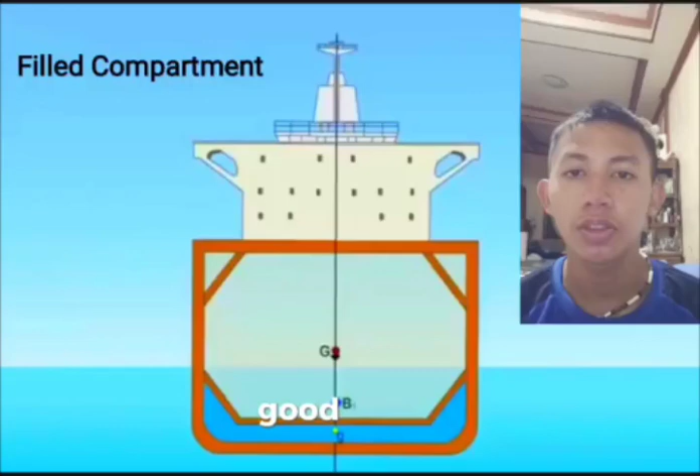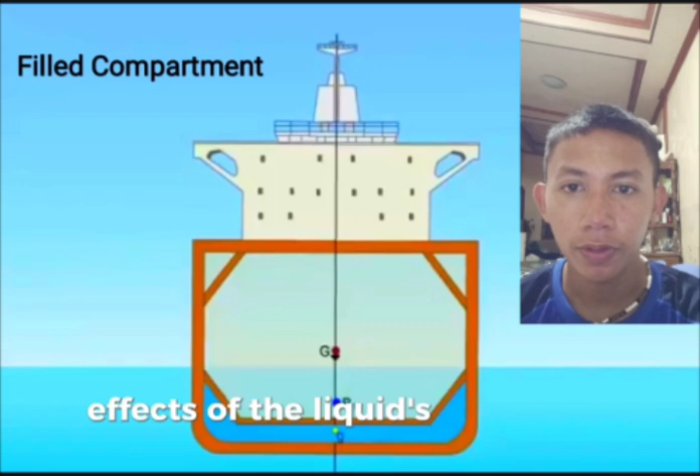I am Cadet Emmanuel Maglaslasea, reporting for today about the effects of the liquid's free surface inside a tank or compartment to the vessel stability.

The free surface effect significantly impacts the stability of a vessel, particularly those carrying liquids. Number one, understanding the free surface effect: when a tank or compartment isn't completely full, the liquid inside has a free surface, a boundary between the liquid and air. When the vessel heels or tilts, this free surface also tilts.

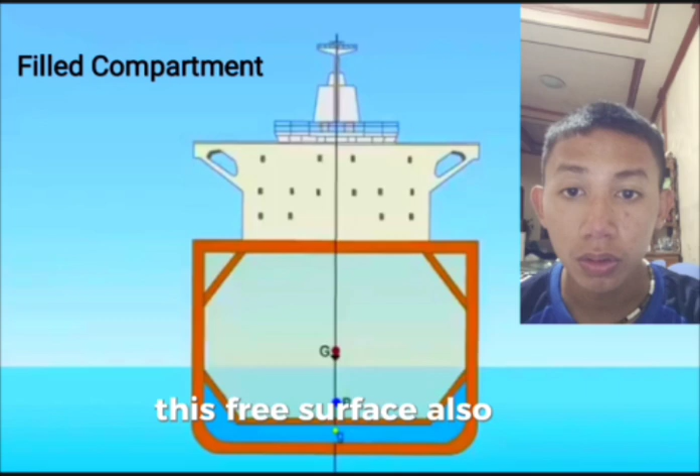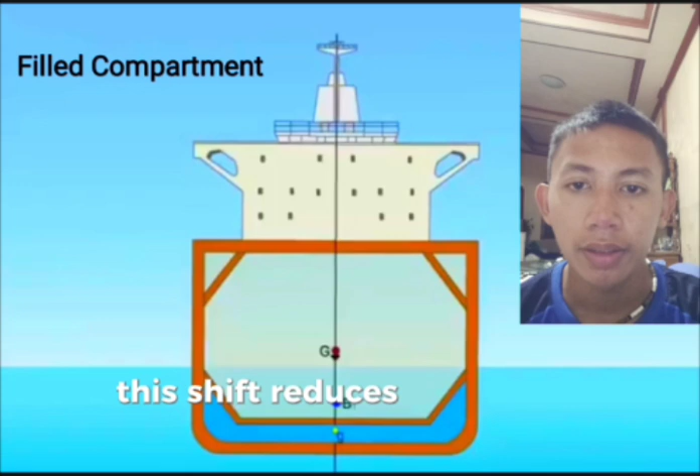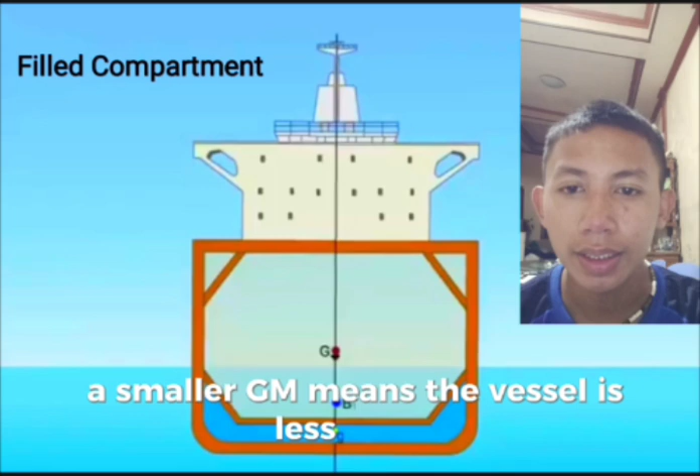This liquid's movement within the tank creates a shifting center of gravity, known as CG. This shift reduces the vessel's metacentric height, known as GM, a key measure of stability. A smaller GM means the vessel is less stable and more prone to capsizing.

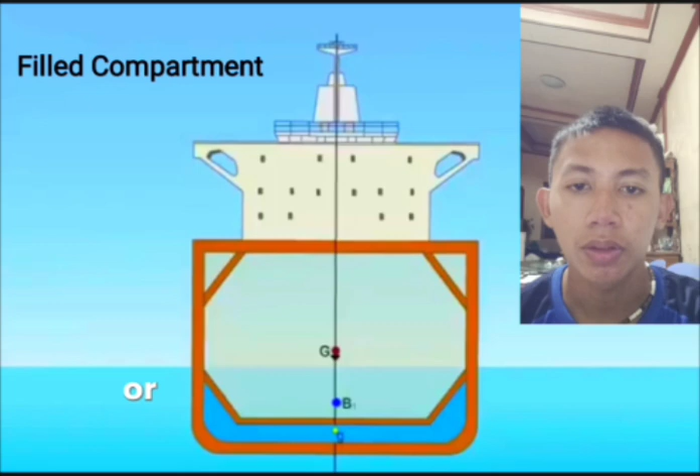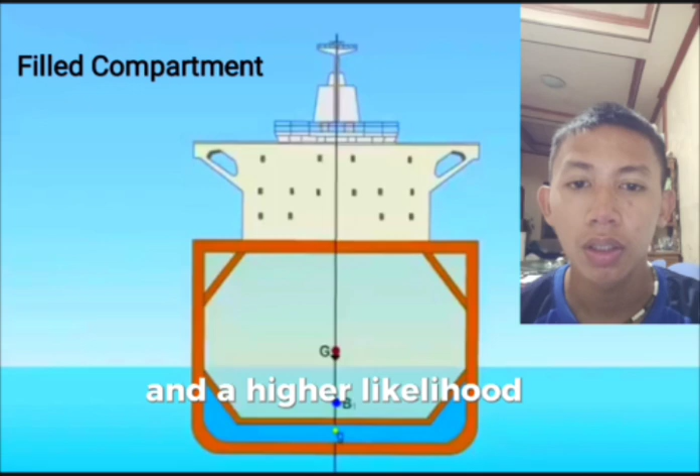How it affects stability: number one, reduced metacentric height or GM. The primary effect is a decrease in GM. A lower GM means less resistance to rolling and a higher likelihood of capsizing. The more liquid, and the larger and more shallow the tank, the greater the effect.

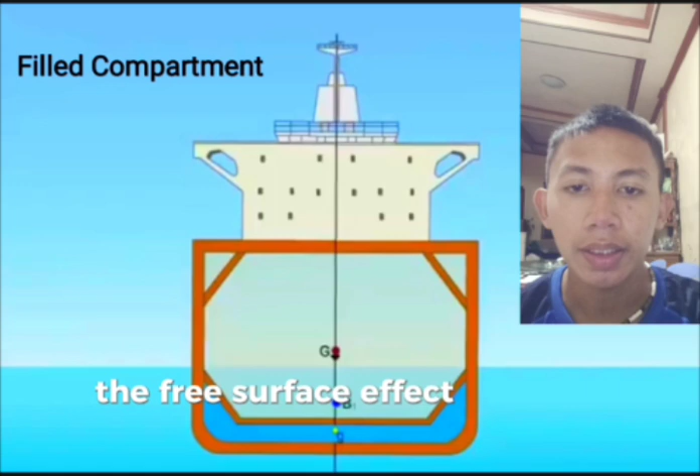Number two is increased rolling period. The free surface effect increases the vessel's rolling period, meaning it takes longer to return to its upright position after a disturbance. This prolonged rolling can exacerbate instability.

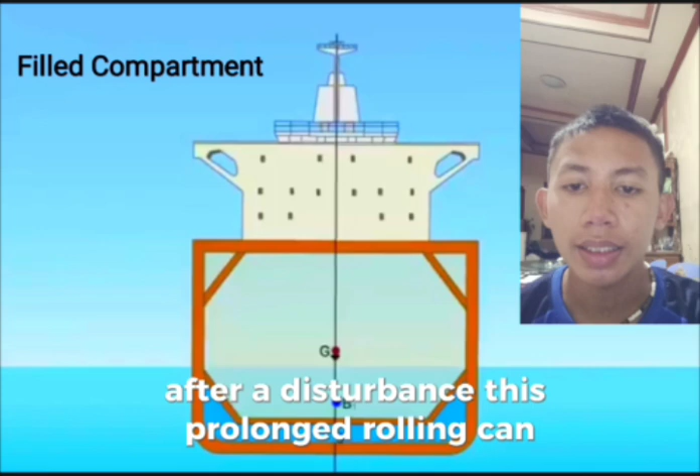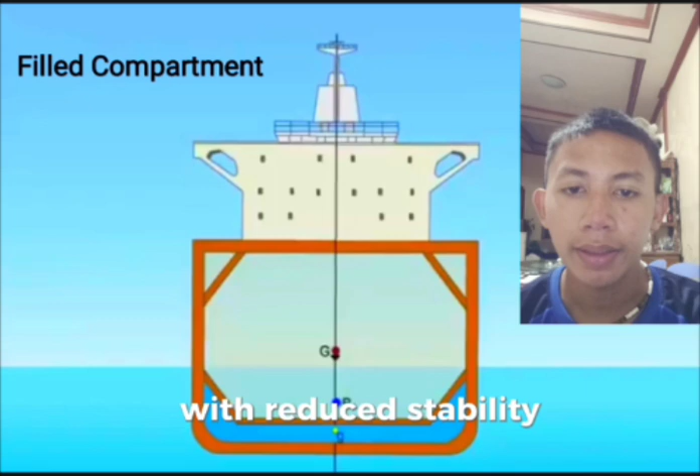Number three is increased risk of capsizing. With reduced stability, the vessel becomes more susceptible to capsizing, especially in rough seas or during sudden maneuvers.

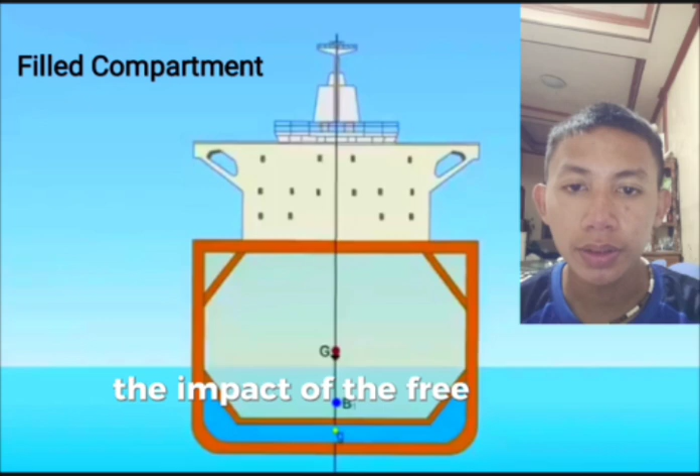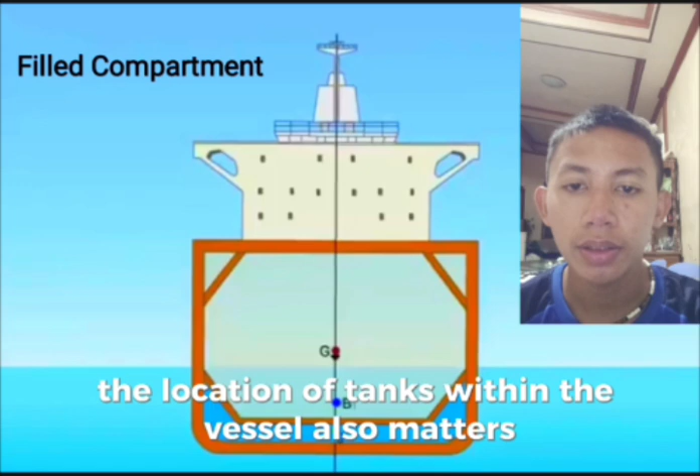Number four is influence of tank shape and size. The impact of the free surface effect depends on the tank's dimensions. Long, shallow tanks are more problematic than short, deep ones. The location of tanks within the vessel also matters; tanks located high in the vessel have a more significant impact.

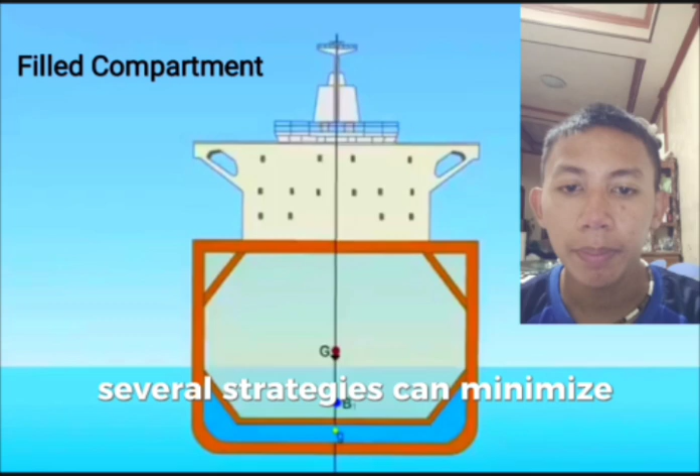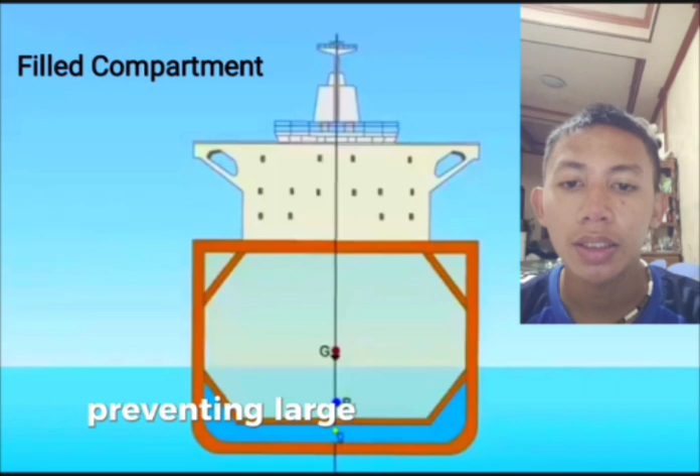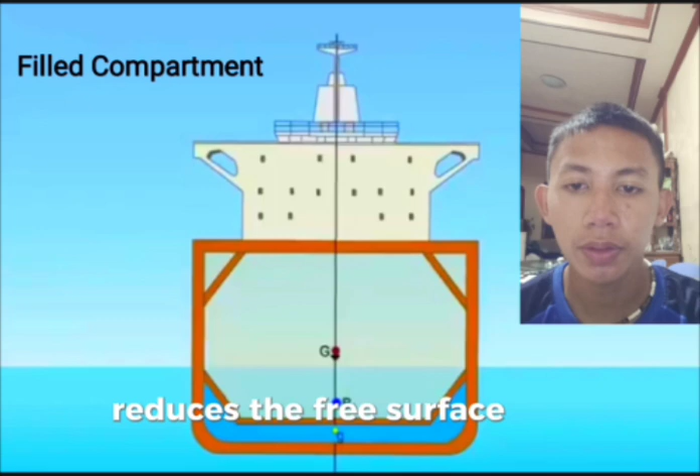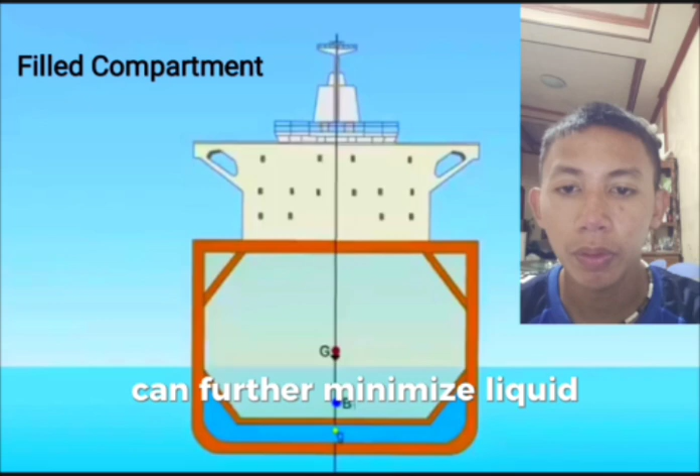Number three is tank design. Designing tanks that are short and deep reduces the free surface effect. Number four is sloshing suppression. Advanced techniques such as sloshing suppression systems can further minimize liquid movement. And number five, final, is proper loading. Careful consideration of cargo placement and distribution is crucial to maintain stability.

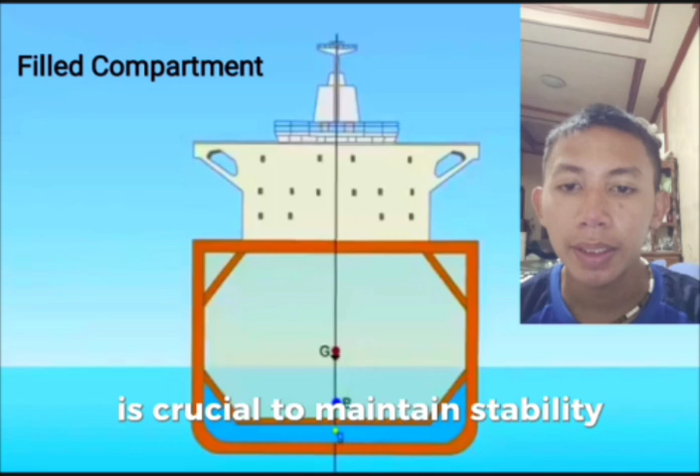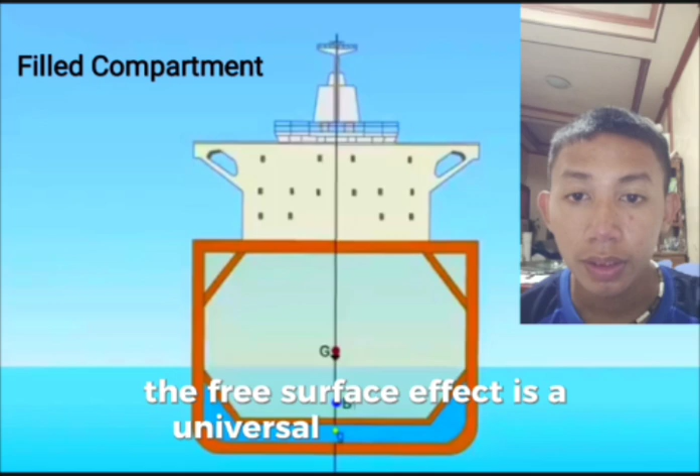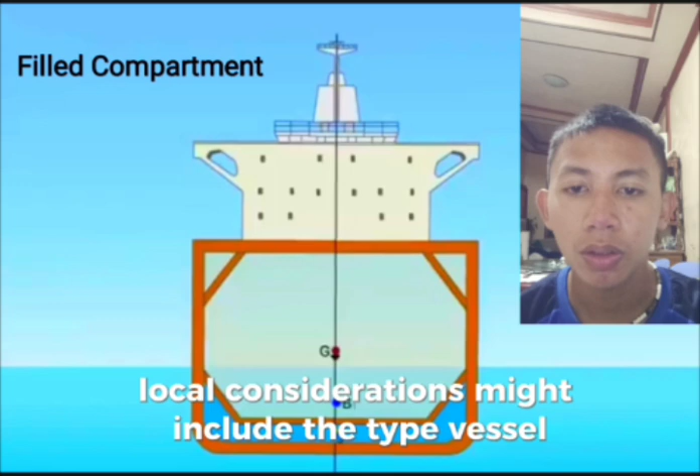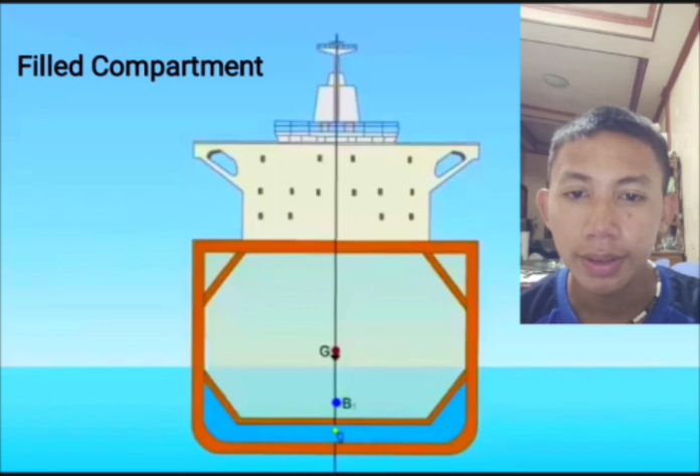Local considerations for the Philippines, Visayas, Cebu: the free surface effect is a universal phenomenon impacting vessels worldwide, including those operating in the waters around Cebu. Local considerations might include the type of vessel commonly used, such as fishing boats, cargo ships, and ferries, the typical cargo carried, and the prevailing sea conditions. These factors influence the design and operational practice to mitigate the free surface effect and ensure safe navigation.

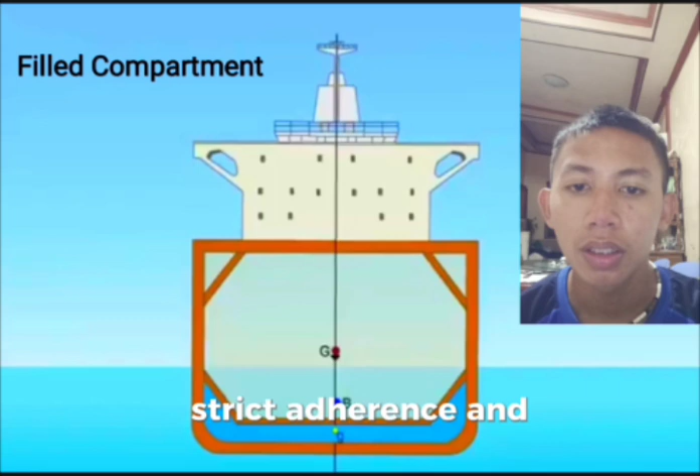Strict adherence to international maritime regulations and best practices is crucial. Thanks for watching.